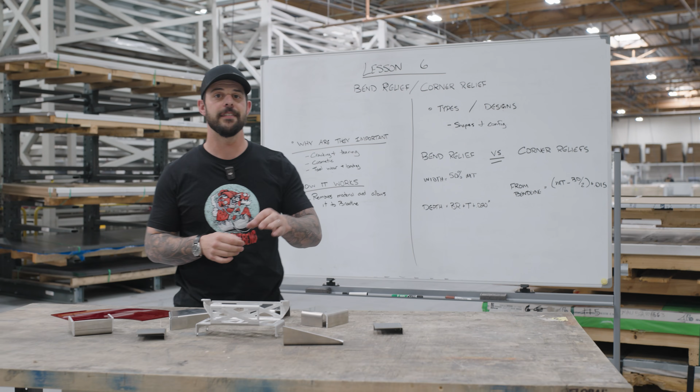All right, on lesson 6, we're going to be going into different types of reliefs that you need to have on your sheet metal parts. If you haven't seen lessons 1 through 5, go ahead and check them out, because a lot of this information is not going to make sense until you understand those lessons.

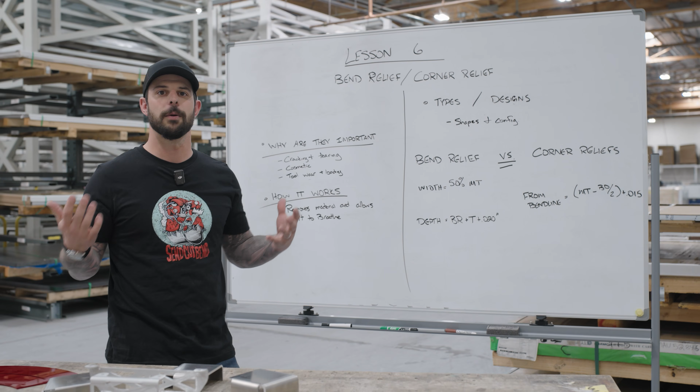So going over here to the board, we're going to be talking about reliefs, why we want to do them, and what they are. Let's start with why they're important and what they are.

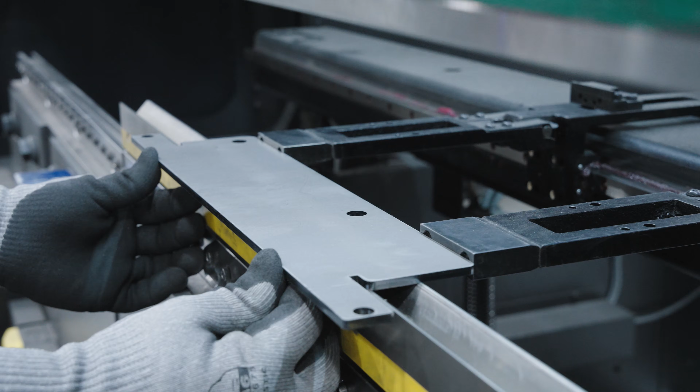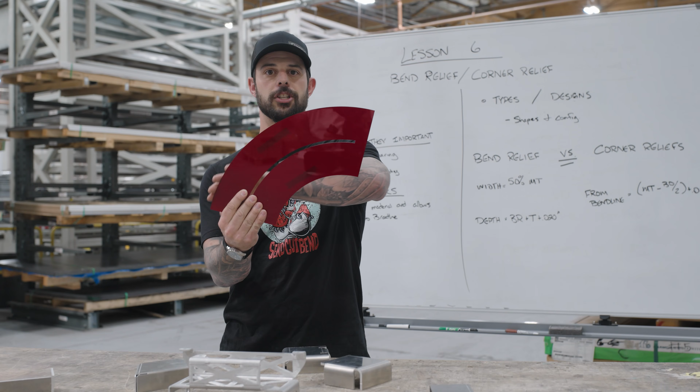In a bend, if we have a part that's bent, we've talked about this in the deformation videos and in the stretch on bend allowance, we have tension across the outside of that bend. So on that bend, we have that tension across here. That tension equals stress, and that stress has to go somewhere.

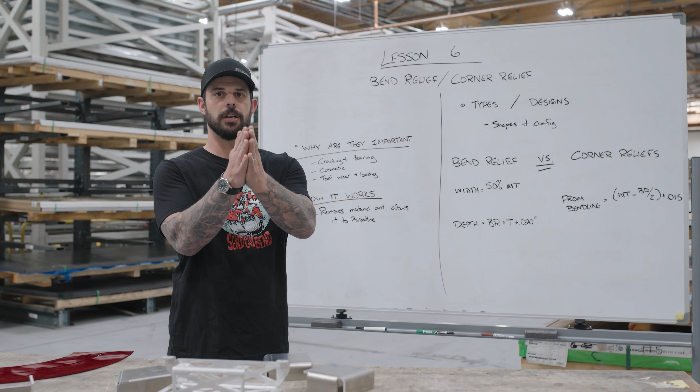If we have too much stress, we get a couple different reactions. We're going to get cracking and tearing, and we're going to end up seeing that material split through it. We're going to see it tear or crack later, sometimes you don't see it initially when you first bend it.

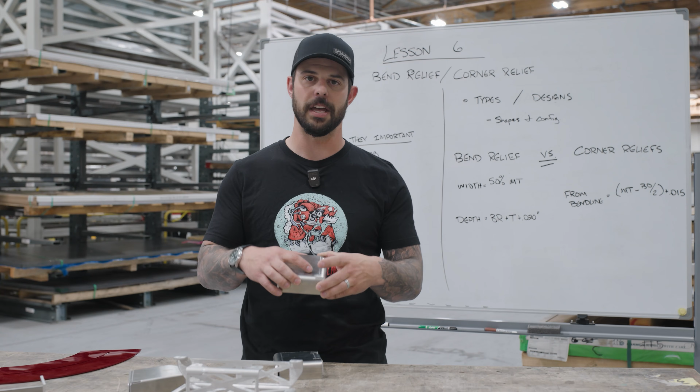We're also going to have cosmetic issues. One of the big cosmetic issues when you don't have relief is a big dimple in your corners. So if I have a 90-degree corner here, what we'll end up seeing with no relief is a big dimple up in that corner.

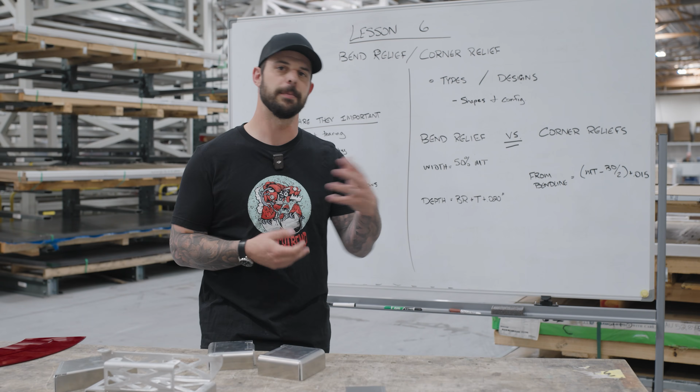And the last thing is that it really does affect the CNC brakes. That increased stress has to go somewhere, and it typically goes back into our tooling. We see premature wearing and sometimes breakage of tools if not properly done. So we try not to bend parts that don't have reliefs.

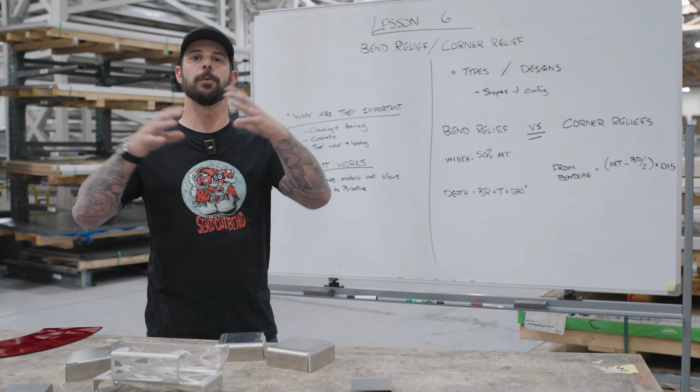Now, how does it work? It's pretty simple. We're just removing material in the area that stress is building up, so it allows it to breathe. That breathing room allows it to shape, so we won't crack or tear, you'll have a better cosmetic finish, and it's easier on our tooling.

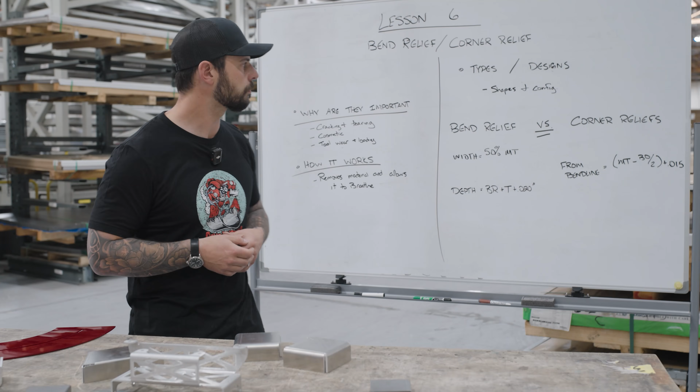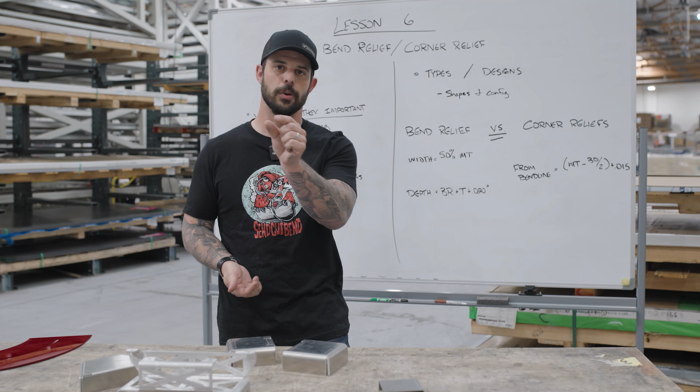There's a lot of different ways to do it. When we talk about types and designs, you'll see people do square corners, round corners, straight lines into the corners, as well as bend reliefs, or half circles into your part. That's kind of up to you and depends more on the design and finish you want. We'll skip over that a bit—I recommend using Fusion 360, SolidWorks, or even Googling this to see different ways you can do reliefs.

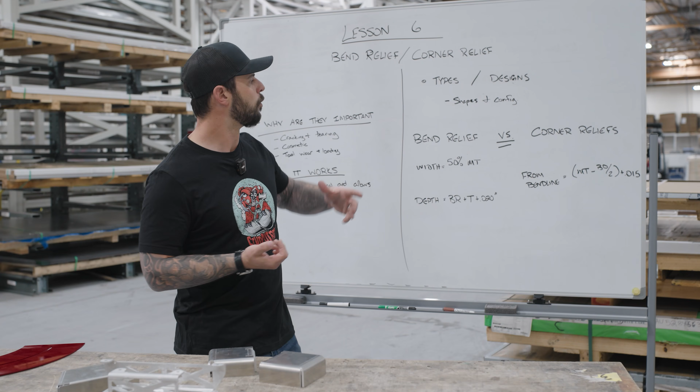What we're going to focus on more is the difference between a bend relief and a corner relief, and making sure you have enough room in the background. So bend reliefs, we'll go over first.

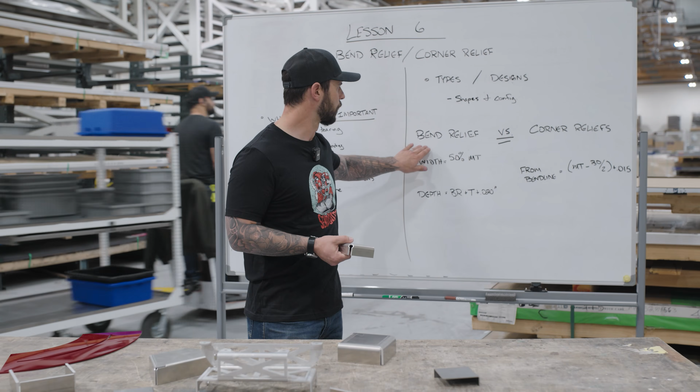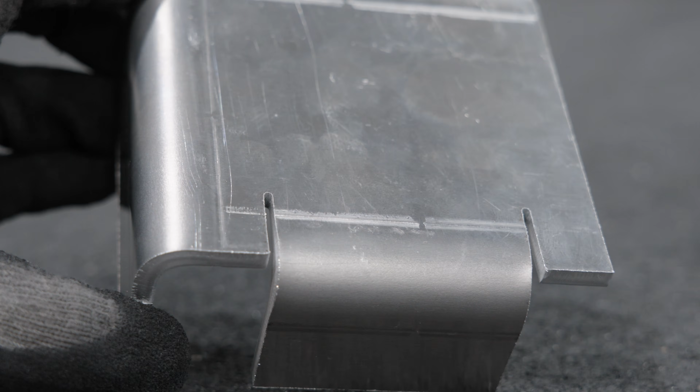With bend reliefs, if we have a straight line like this and a corner getting bent over on that line, it's a straight cut into the part. I have a part here that doesn't have reliefs. We can see stress built up in these corners, and we'll see tearing eventually on that part if you don't see it already.

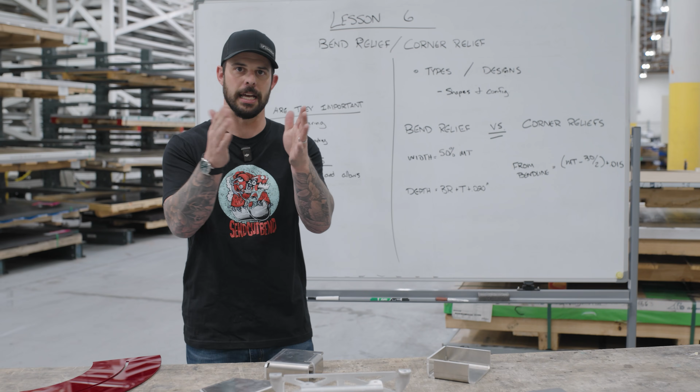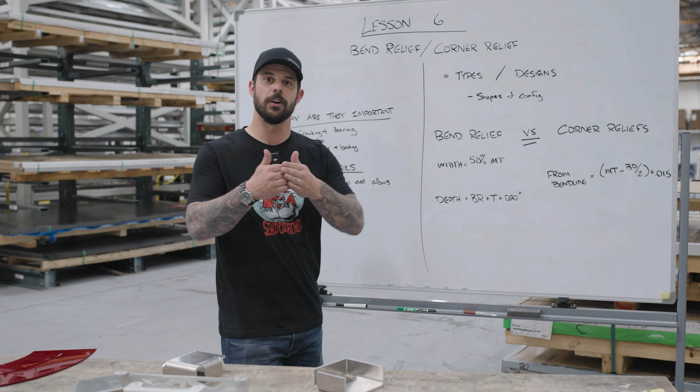So how do you know how much relief to put in? We need to know how wide to make it and how long into the part to properly relieve that stress. The rule of thumb, which you'll see on our website and guidelines, is to make that slot width half the material thickness. And how far into the part we want to go is the bend radius plus the thickness plus 20 thousandths, which is what we recommend.

Now, Fusion 360, SolidWorks, and a lot of popular CAD softwares will do a lot of this math for you—it saves you a ton of time. I typically recommend just going with what they have; I've never had any issues with it.

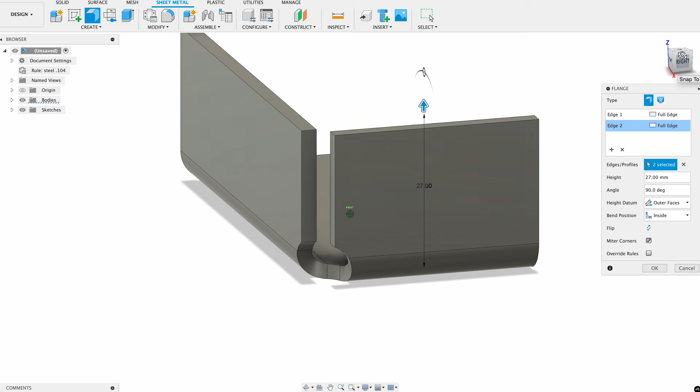Okay, next is corner relief. Corner reliefs we put in on two 90-degree corners, like this one right here. If I match it up with a mating part like this, what we end up seeing is those two 90-degree corners come in, with stress pulled this way and stress pulled that way, resulting in a little dimple or raised area. Cosmetically, it's not appealing.

It also tends to crack and tear, especially on the inside of your part. So what you end up doing is either a round shape or a square shape—pretty much anything that brings back that whole radius, relieving the stress in that deformation area.

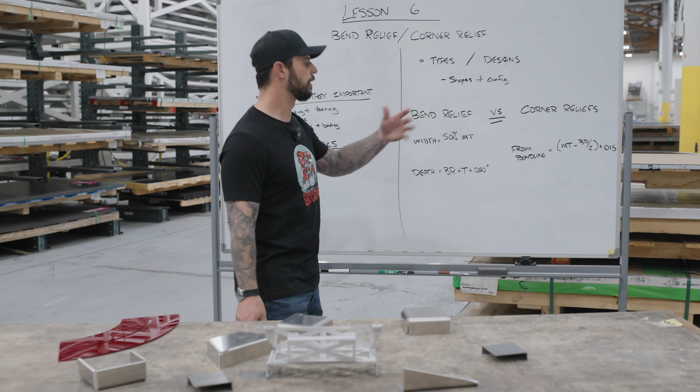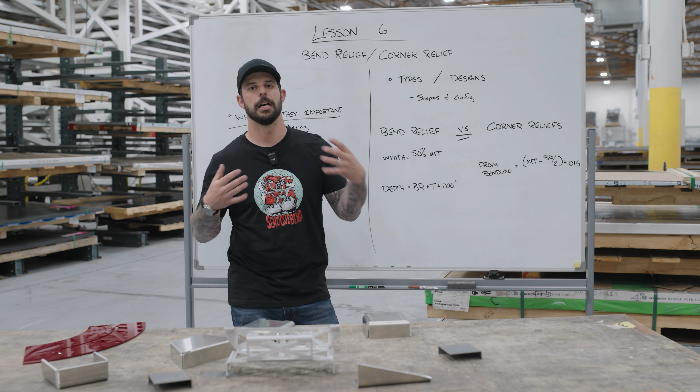From the bend line into the part, the equation we use in the background is the material thickness minus half of the bend deduction, then add 15 thousandths to that. Again, the simplest way is having Fusion 360 or SolidWorks do this, but if you're doing your stuff by hand, know that's the equation you should use to be successful on your parts.

All right, so that's it for lesson 6.